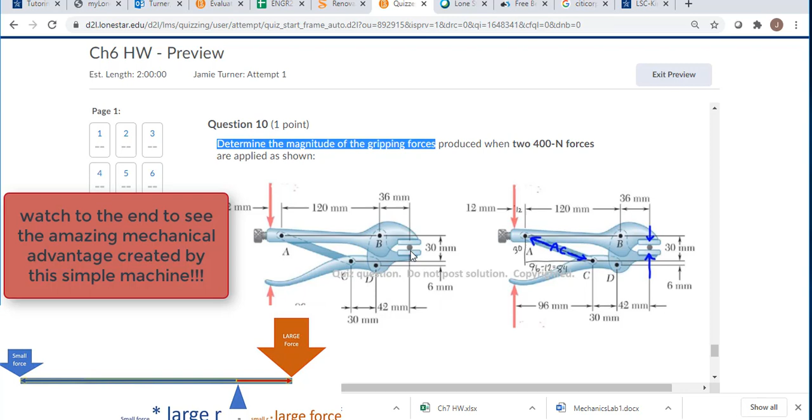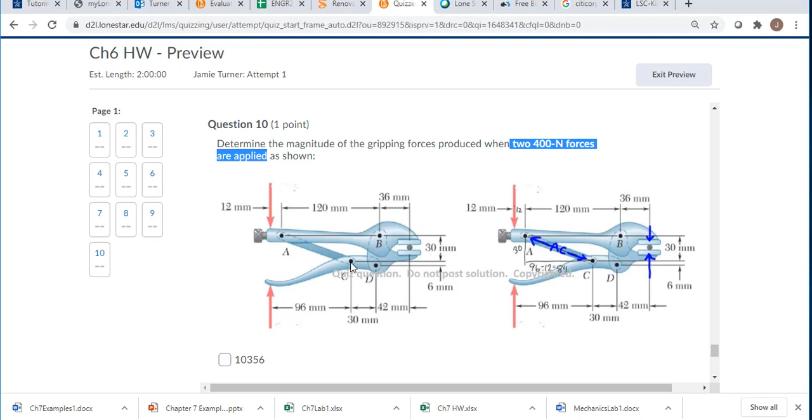So what we have here is we want to get the magnitude of the gripping force. The gripping force is over here on the right-hand side of this machine. If we have two 400 Newton forces applied as shown, so we're squeezing the handles over here, we're going to get a different force over on the other side. We've got some lever arms going on, and this will be interesting, we can maybe look at it with or without this member AC in the machine to see how this is helping out.

The dimensions on here are a little bit tricky, and that's why I gave you guys this added figure here. So when you're looking at the direction of this AC force, we're going to grab this 30 millimeters right here, and then the base of this triangle, take it off of the bottom. So this 96, but it's not the entire 96. We've got this little 12 millimeters up here at the top. So sometimes you have to really study the dimensions of these things to figure out what's going on.

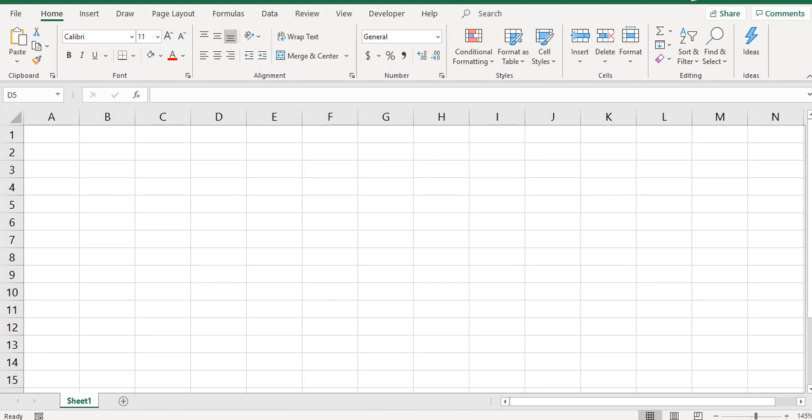Okay, I'll go ahead and do this in Excel. Let me pull over a blank worksheet here. What we're going to do is walk through it with the piece that we know the most about over to the side that we know the least about. So taking this guy, look at each solid piece of this individually.

So here's our yellow handle, and we have a two-force member here in green. So we know this is in compression, and we know the direction of the force because it's a two-force member. Then here, this orange piece will be the last one that we do. So we have applied force, the two-force member, and it's kind of pivoting around this little pin B to have the gripping force over here on the other side.

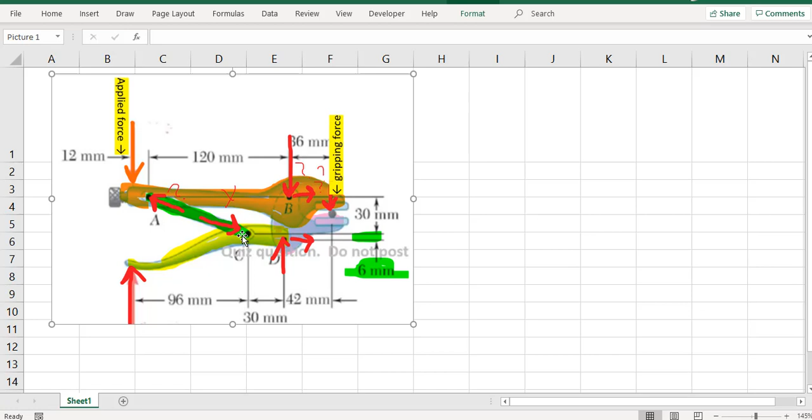We're going to start with the yellow piece because we can actually solve for what's going on in this one, and we don't need to solve for the whole thing. Really what we need is AC, so this little two-force member. So if we take the moment around D for what's happening on this yellow piece, we can get what AC is here. Let me go ahead and copy over another diagram here.

So we're going to start by just looking at piece AC. We don't actually have to solve for the forces acting at D. What we can do is take the moment around this pin and make sure that you have the dimensions right for this compression member coming down.

Okay, so taking the moment around this guy, and I'm going to go ahead and copy over some moment tables here. And maybe I want to copy over what we're given in the problem statement. So I think you guys were given 400 newtons applied over here at the handle. I'm going to do something a little bit different again so that I'm not giving you the entire answer here.

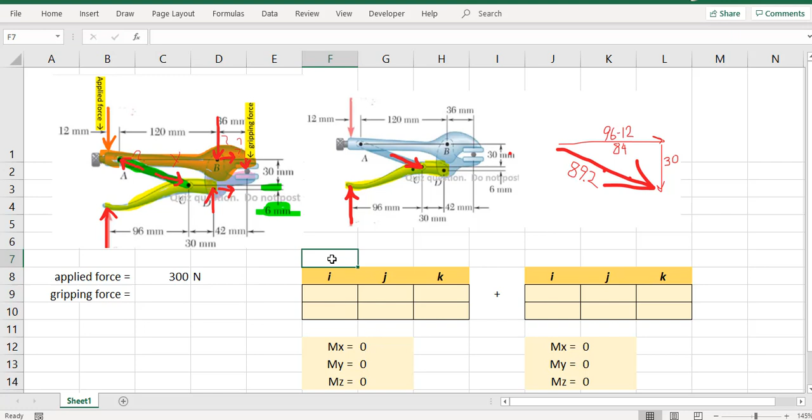So we'll take the moment around D. So we're going from D to the handle, and then we have from D to that compressive member AC. Okay, so if we go D to the handle, that's going to be going over, we have this 30, 96, we're going in the negative direction. So we're going from D all the way to this applied force.

And in this case, the force is going upward in the J direction. So I'm going to just connect it over here. So later on, I can change the applied force, and all of this should update for the different scenario. Okay, so here is our first moment that is around D generated by this applied force over here.

When we get over here to AC, so again, we're going to go from D to AC, and pay attention to the dimensions here. So we're going to go negative 30 in the X direction, and then there is a little bit of a gap in the y direction too. So we're going to go up 6 millimeters. If you just keep everything in the same dimensions, it's okay to not have meters here. It'll cancel out at the end. Just be consistent through all of it. So we're going over 30 and up 6.

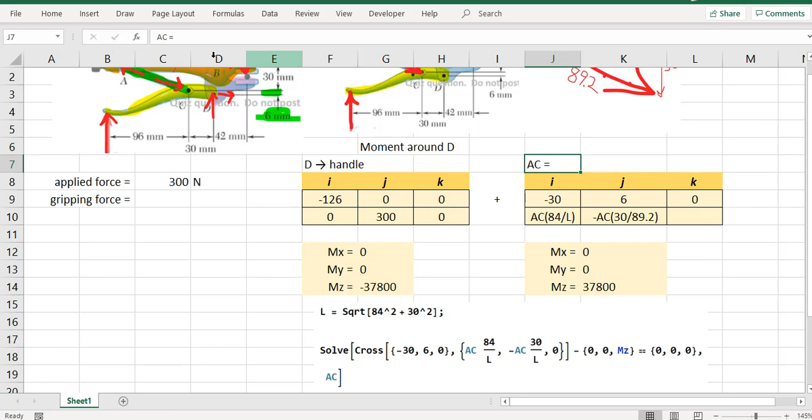So I'm going to put another little table up here where we're going to go ahead and solve for AC. I'm going to put those dimensions up here too. So the x dimension is equal to 96 minus 12, and I know that is 84, but I want to just leave that equation in there. So in the future, if I remember, why did I use 84? I can go back up here and remember where that I direction came from. And then the j component is 30, and the overall length of this thing.

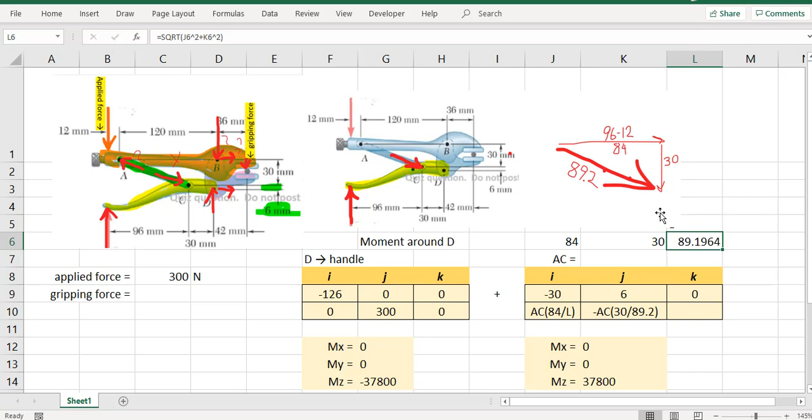So let's get A squared plus B squared - that would be the overall length of this guy. If I plug this in, I have R cross F, where negative 30, 6, so I'm just showing you how I did this in Mathematica, and then the force is going to be positive in the I direction, negative in the J direction, and this cross product needs to add up to this number here. So if you crank through the algebra, the magnitude of AC ends up being this.

So I'm going to put that in. I'm going to say equals my moment times square root of 221 divided by - so that is the magnitude of my AC - and let's make this

positive, then I can fill in the x and y components. So my x component, that's going to be this times the fraction in the x direction - that's kind of my little unit vector, how much is in the x direction. And my y component is going down, so I'm going to multiply this by the fraction in my y direction. Think of those as unit vectors.

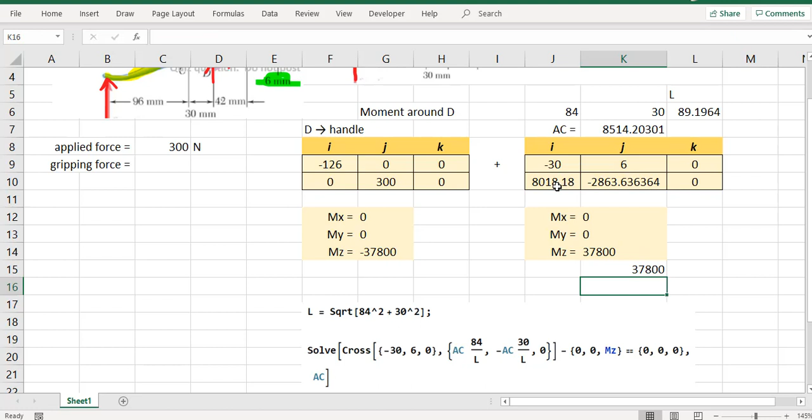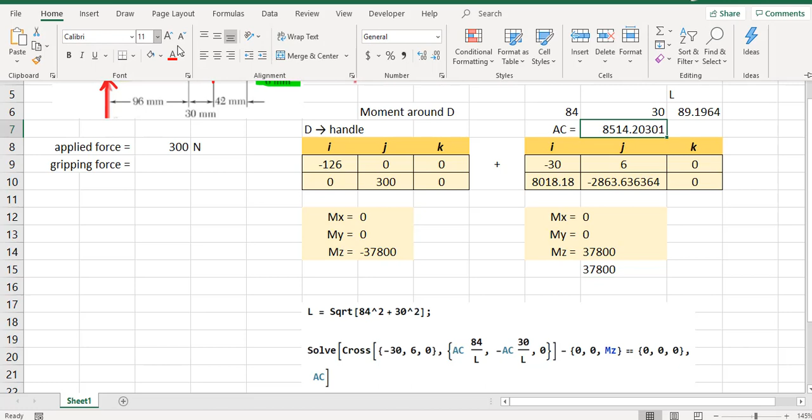And just as a last check, if I say equals x times y minus y times x, I'm going to get that positive 37,800. So that means I know I got the right magnitude for my AC force.

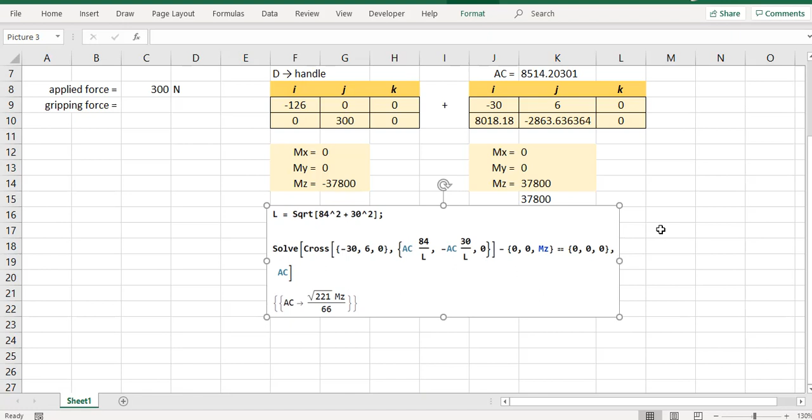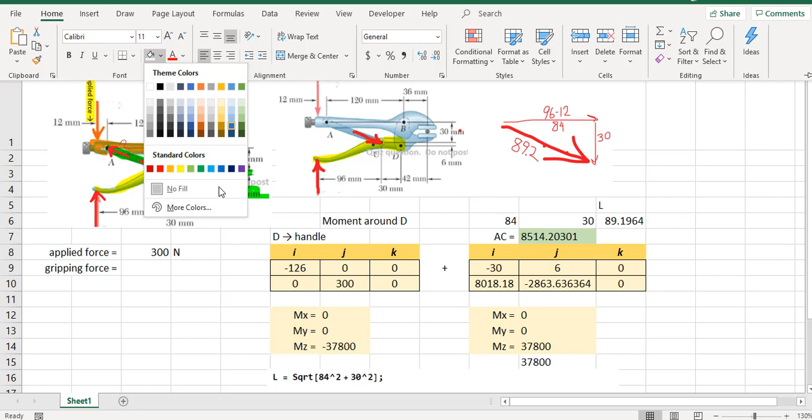So now that we have this green member here, we solved for that by just taking the moment around D, and that's a little bit tricky - you walk through the cross product, or you can do a goal seek in Excel to solve for that. But that's going to be important. Let me go ahead and color code that one with green - that was a bright green. So this is going to be this member right here.

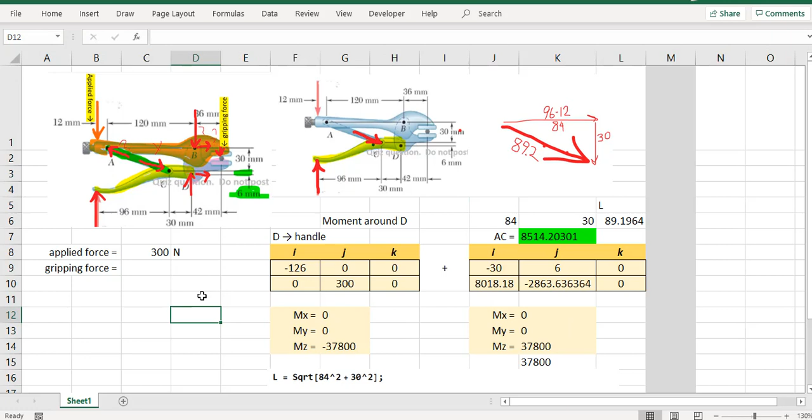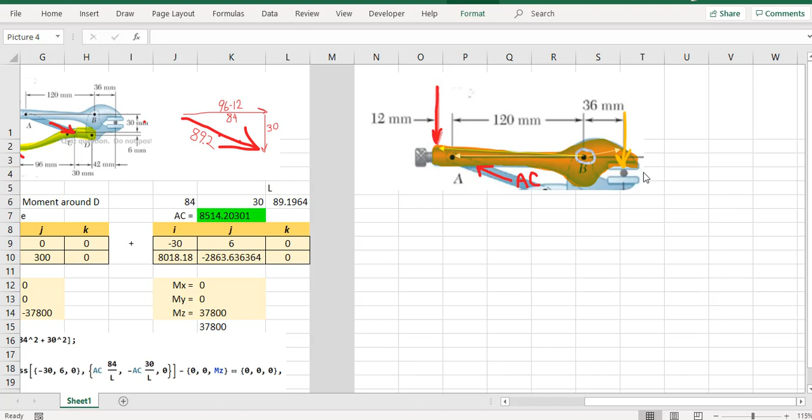So now let's walk to the next piece of our structure, and that is to look at the forces happening on the handle over here. We know AC coming up, we know the applied force pushing down, and the next piece is we want to get the gripping force. So we're pushing down on a wire or something, but if we think about the forces acting on this orange piece itself, the wire is pushing up on the orange piece.

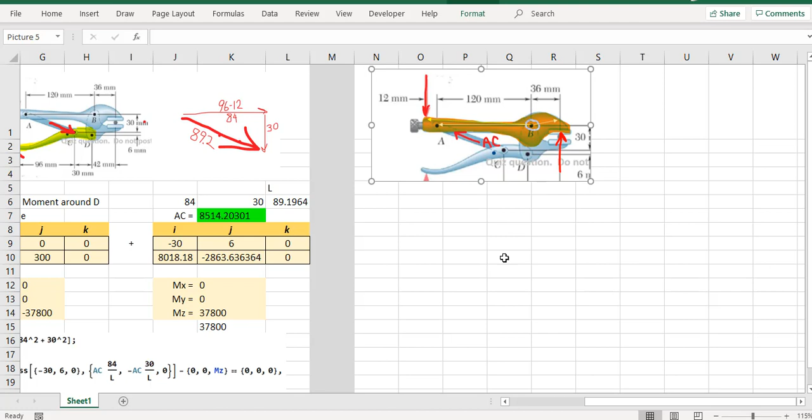For this one, what we're going to do is take the moment around this pin B. That way we don't have to solve for the forces at B. What we're really after is the gripping force, and our mechanical advantage is going to be the difference between what we apply versus how much pressure it puts on here. Taking the moment around B, I can go ahead and copy my moments to get some tables in here. So for this one we're going from B to the applied force, from B to AC, and then from B to the gripping force - three moments that we have to add together here.

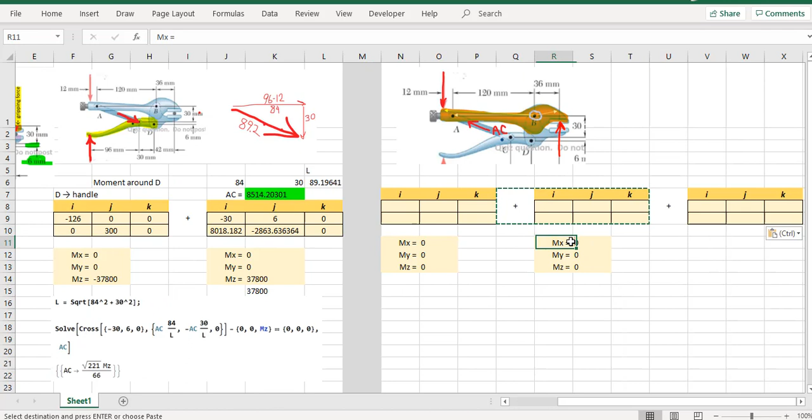So let's go to the left from B to the applied force - that's going to be 120 plus 12 in the negative direction, and that applied force is negative over here. Going to link that over again. So there's our moment from the handle - that's going to be counterclockwise. Counterclockwise is positive. From B to AC, so this is going to be 120, negative 120.

And AC is now pushing up - so it's pushing down on the handle, but we're going to take the opposite of what it was over here. So if we go through that moment, here's the moment from AC, and what's left, this guy is going to have to balance it. So we're coming to the right, 36, and this will be going up in the Y direction, and it's going to have to balance the moment around B. So we'll say equals negative this plus this, and our force will be equal to this divided by that.

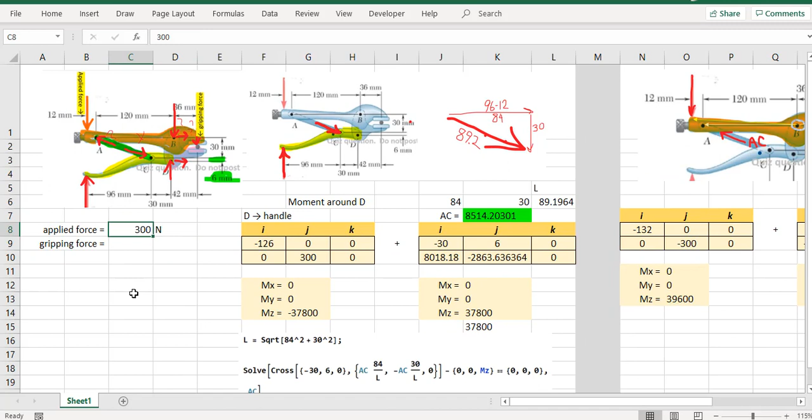So in this case, our gripping force would be 8,445 newtons, and we got there by applying 300 newtons. So if you look at comparing these two, force applied equals - that was only 300 newtons, and by applying 300 newtons, we were able to get out of this thing this force grip. So we can calculate our mechanical advantage here.

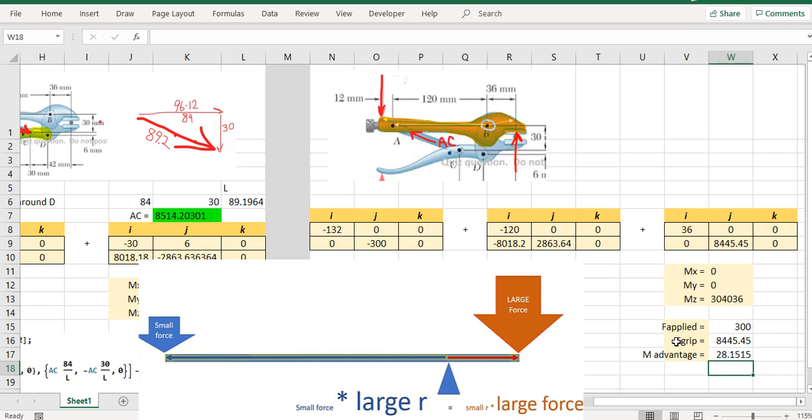So that gives us a mechanical advantage - it's calculated by what you get out of it divided by what you put into it. So wow, 28 times the force that you put into it. That is very impressive, right?

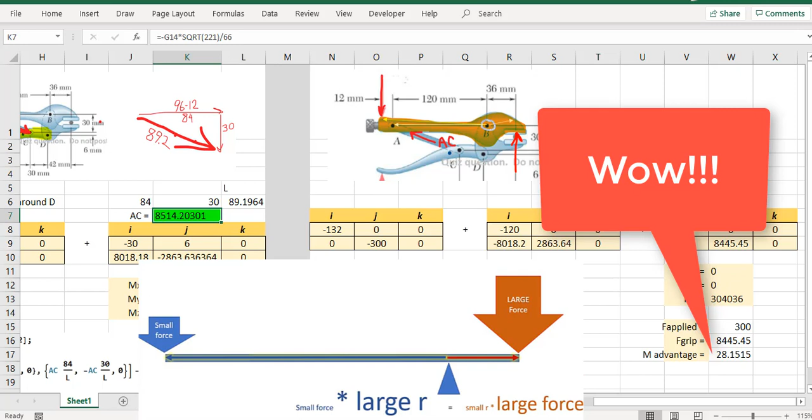That's really impressive. What would happen if I did not have AC in here? What would happen to this? If I made this zero, it doesn't work. So think through this intermediate member and why you would design it this way. This is a very nice mechanical advantage - for a small handle, if you did that with straight lever arms, it would have to be a huge, huge handle. But instead of making a huge long handle, we can put this intermediate member in here, and that will give us the same effect. So very, very clever design for this set of pliers.